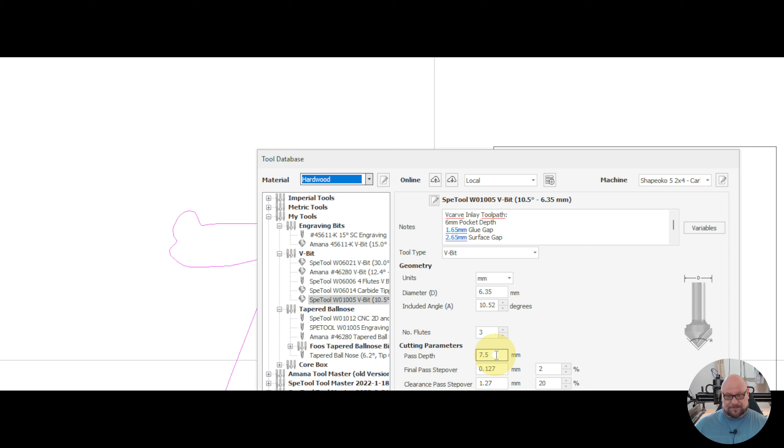And we are going to do a Vcarve engraving toolpath. That's going to be a start depth of 0, a flat depth of 6 millimeters. And for our tool, we are selecting the SpeTool W01005 V-bit, which is a 5.26 degree tapered ballnose bit. We will configure it as a tool type of V-bit. And we will go a full depth of pass that will exceed what our pocket or our plug depth will be. Spindle speed, feed rate, and plunge rate will be dependent on your CNC.

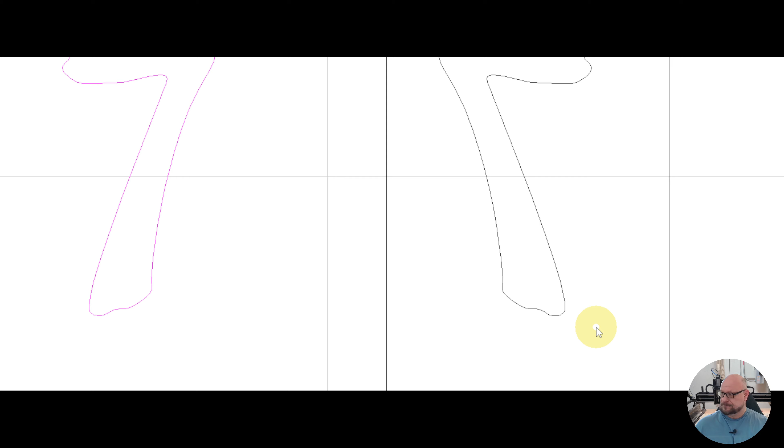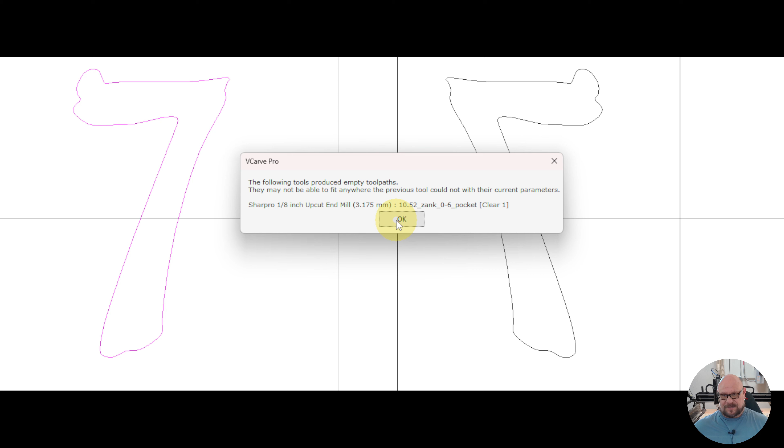All right, so now let's go ahead and name our toolpath. And we will call that 10.52, which is the angle of our V-bit, and Zank, because we're using the Zank method on this, 0.6 underscore pocket, because this will be our pocket toolpath. And we can go ahead and calculate that out. And as we see, we get an error that says that our 1/8 inch upcut end mill is not going to fit for our pocket. We can say OK on that, and that's fine.

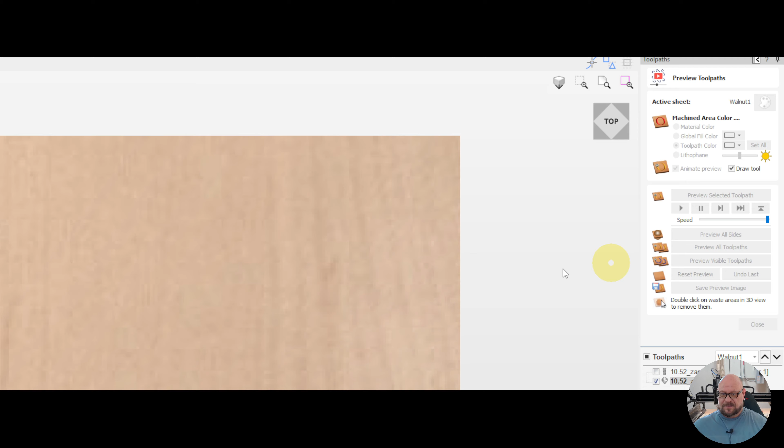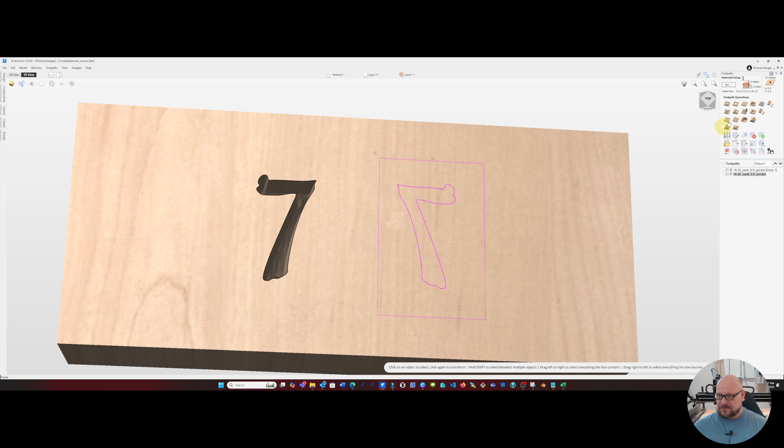So now that the toolpath is drawn, we can go ahead and preview the visible toolpaths. And what we see is that we get our pocket. Now that we've done our pocket, we can go ahead and highlight our second set of vectors, which we can do right here on the 3D toolpath. We'll highlight those.

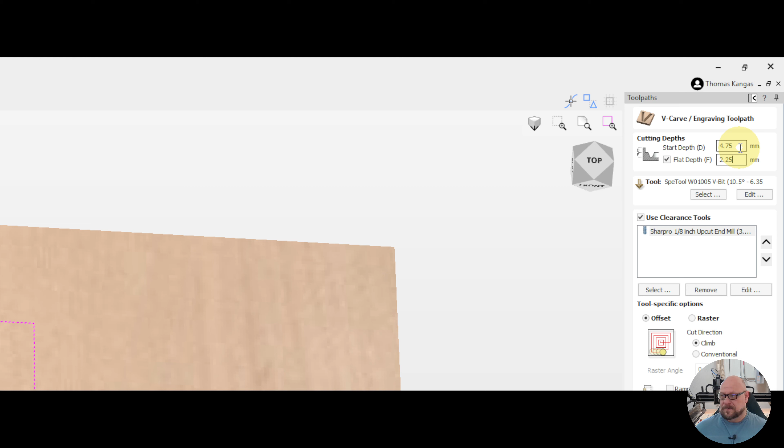We will create another Vcarve engraving toolpath, and this time we're going to go with a start depth of 4.75 millimeters and a flat depth of 2.25. And I derived those numbers from using the formula again of start depth plus flat depth will equal pocket depth plus 1.0 millimeters. We'll use the same SpeTool W01005 V-bit and the Sharpro 1/8 inch upcut end mill.

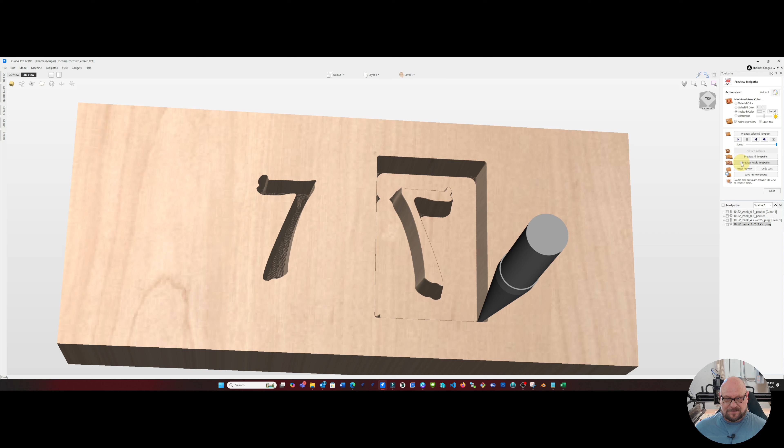We'll go down here and we'll name this toolpath 10.52 underscore Zank underscore 4.75-2.25 underscore plug. And we can calculate that out. And now if we zoom out and we preview our visible toolpaths, you'll see that we get our plug side. The only thing left to do now is to export those out and run them on the CNC.

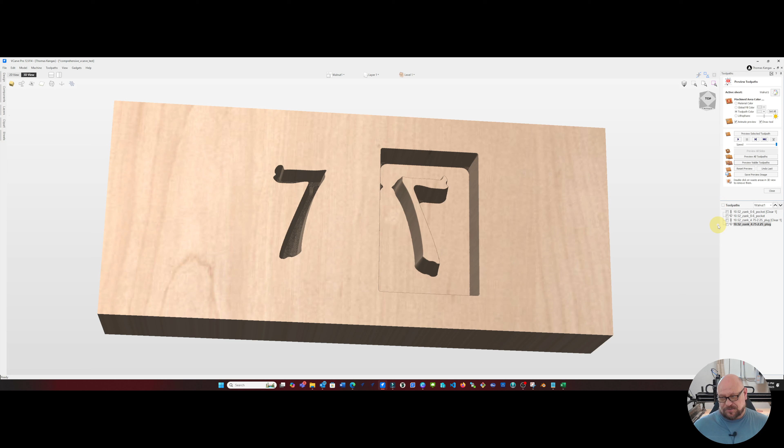So let's go ahead and go back to our Vcarve software and adjust those toolpaths. Okay, so back in Vcarve, since we already have our pocket cut, we're going to just duplicate our toolpath for our plug. So we'll right click on that and select duplicate. And then we will adjust that toolpath. In this case, I'm going to set this to 3.5 and 3.5. And again, everything else will remain the same.

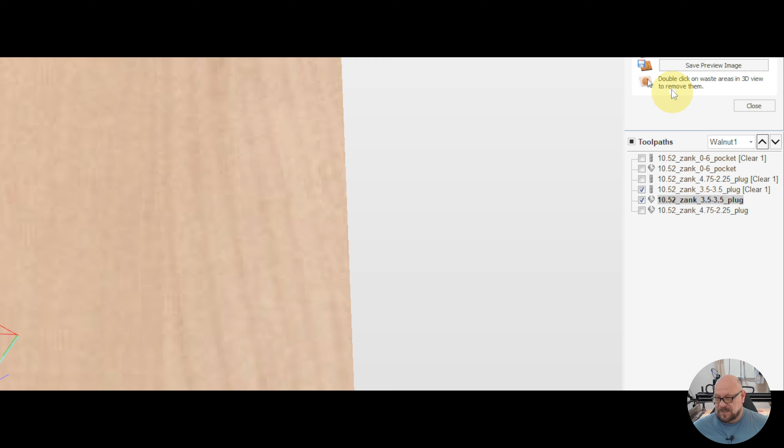And we're going to call this 10.52 Zank 3.5 and 3.5 and plug. We'll calculate that out. We will reset our preview. And what we'll do here is we will adjust these up so that we are cutting first our 1/8 inch end mill and then our 10.52 degree V-bit. We can go ahead and preview the visible toolpaths.

And what we'll see is that goes ahead and creates a new pocket for us. Now we can go ahead and export those out to the CNC, and we'll be right back to see what kind of a fit we have. Okay, so in the interest of saving time, we're not going to show footage of actually carving on the CNC for the additional toolpaths because they pretty much look the same all the way through.

But what I will show you is that I have a plug and the pocket for our Zank toolpath. This is the 3.5 millimeter start depth and flat depth. And what we'll see with this one when we insert it is that it fits in nice and tight. There's no movement whatsoever, and it's very, very difficult to pull back out. So this should be a good depth and should leave us without any kind of glue gaps around the surface when we carve it.

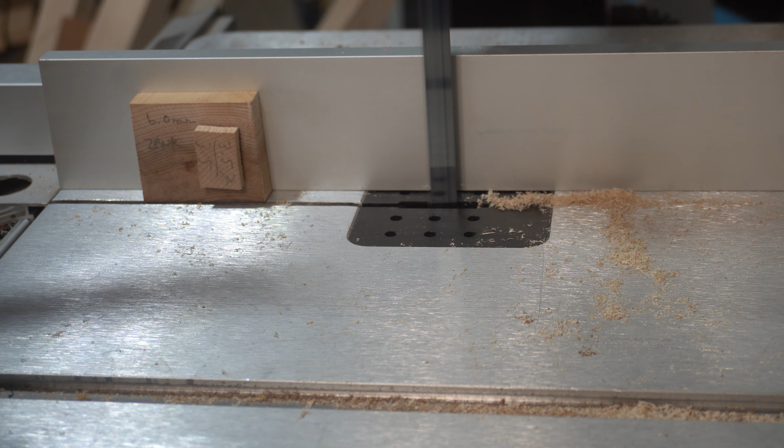Okay, so now without gluing, we're going to go ahead and take this to the bandsaw and remove the top layer of this inlay so I can show you that it's tight, and be very careful not to get yourself caught up in the blade. These are small pieces and I normally would just cut them off with the CNC. Alright, so if you look real close, you'll see all around our inlay there are no gaps whatsoever. So it's very tight. When it gets glued up, that will be a perfect inlay.

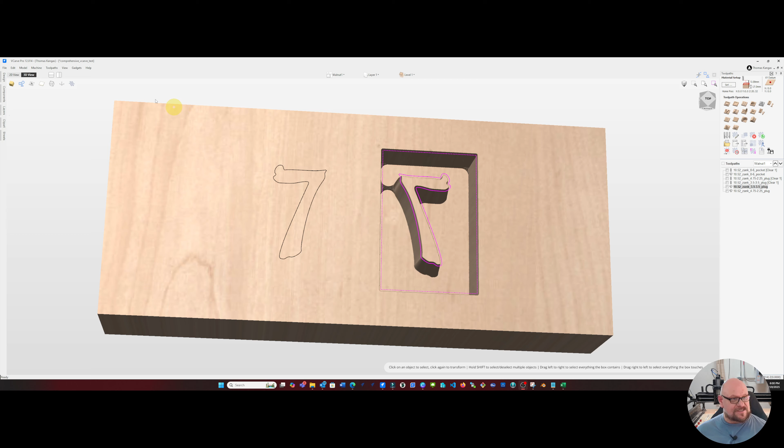Okay, now that we've gotten good parameters for our Zank Vcarve Inlay, I'm going to give you a quick tip here on how to make sure you always remember these settings. What you can do is you can go under Toolpaths and your tool database, and once that opens up, you can select your tool, and in this case it's my V-bit, my W01005. And in the notes section you can put in your parameters.

See, I've done this in the past for the Vcarve Inlay Toolpath, so we'll go ahead and do one for our current. Wait for the computer to catch up with me there. Okay. So we're going to, on this one, say Zank Inlay Vcarve Inlay Toolpath. And we'll say pocket

6.0 millimeters. Plug start depth is 3.5 millimeters. Flat depth 3.5 millimeters. And then we can apply that and say OK. And now our settings are saved.

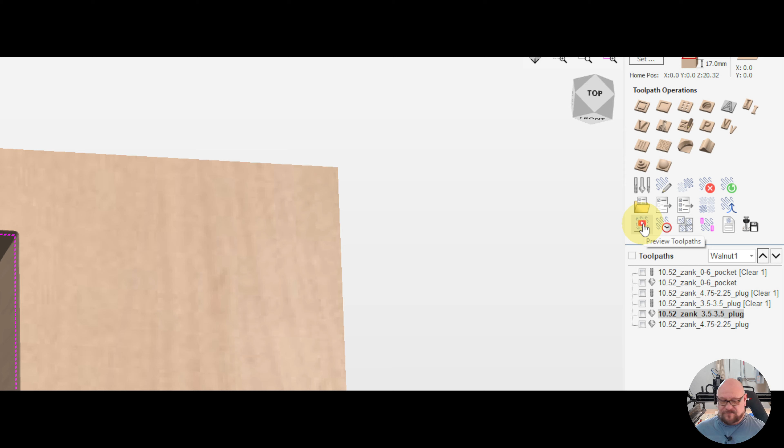Okay, so now let's go ahead and jump into the Vcarve Inlay Toolpath. Very first thing I'll do is I will reset our preview so that we get rid of the old stuff. And then we're going to do Vcarve Inlay Toolpath. So our pocket depth is going to be 6. For our glue gap, we'll set our glue gap at 1.5 and our surface gap at 2.5.

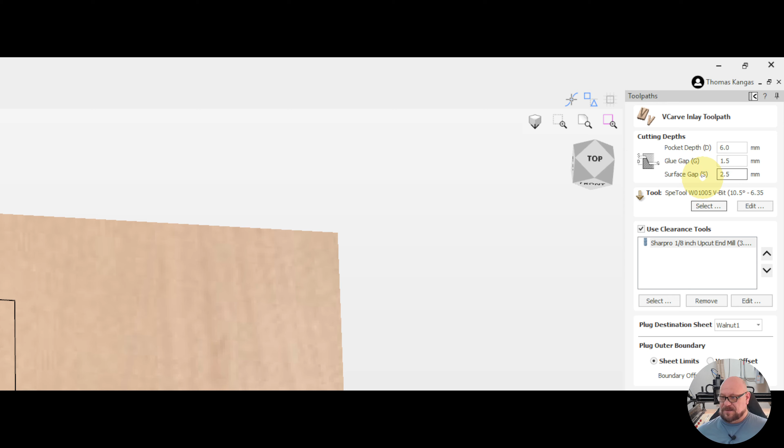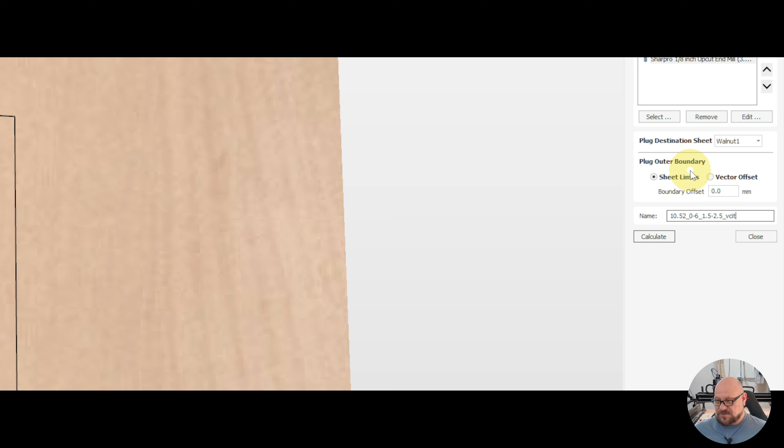And we will call that 10.52 underscore 0-6 underscore 1.5-2.5 for the plug side. And we'll call it VCIT for Vcarve Inlay Toolpath. We are going to do a vector offset. We'll set that to about 5 millimeters, but that's not important. We're going to wind up deleting that vector because, as you'll see, the toolpath will calculate and create the mirrored image with its offset. So we'll go ahead and calculate that.

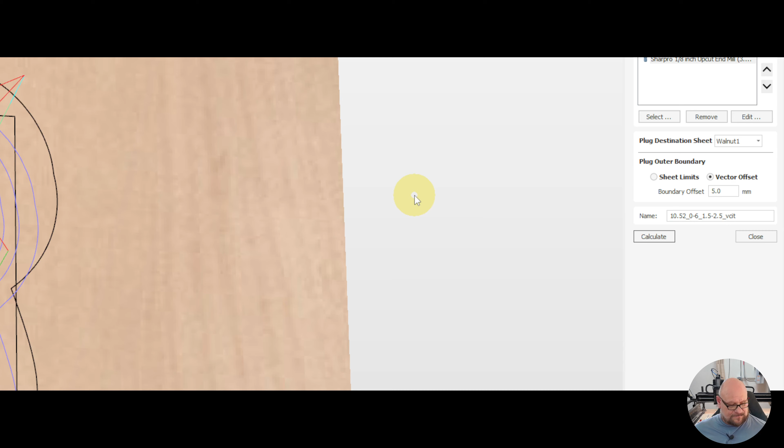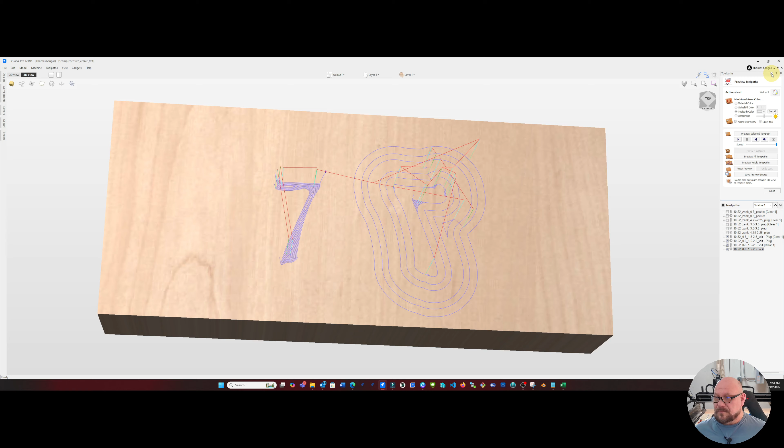And again, we have our error saying that our toolpath is not going to be wide enough to allow for our 1/8 inch end mill. Go ahead and say OK. Now we need to switch back over to our 2D view. And what I'm going to do is delete that 5 millimeter offset. And what we'll do instead is we will redo this toolpath.

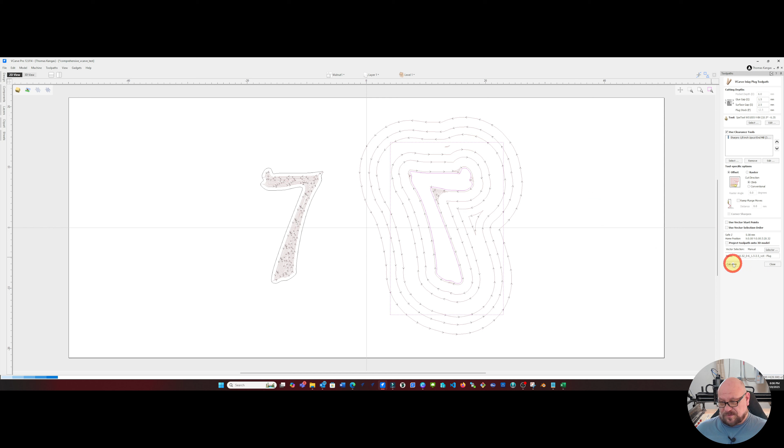Sorry, let's make sure I got the right toolpath. See, that's the clearance on the plug. So yeah, that's the right toolpath. We're going to select our inverse or our mirrored 7, and we're going to take that square toolpath around, and we're going to recalculate that. So now we have our square toolpath. It's just easier. It saves a little bit of time on generating this. All right. So now what we want to do is we want to start with our plug side.

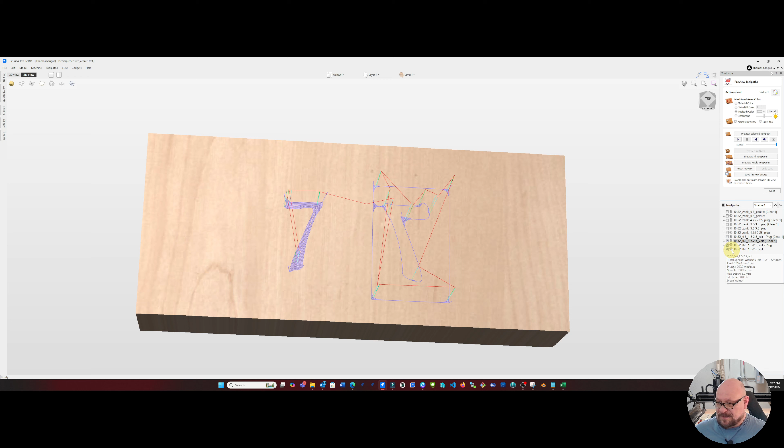But we want to get our toolpaths lined up so that we're using our 1/8 inch bit first, then our V-bit for the plug, and then V-bit for the pocket. And if we preview those visible toolpaths, you'll see that it is going to go ahead and create our pocket. And what we'll see is that we've got a plug and a pocket path. Now we can go down to the CNC and cut those, and I will show you what the result of that cut was.

Okay, so after the CNC, we've got our 1.5 and 2.5 plug, and you'll notice that it slides in and it's very, very loose. So because this is loose, we're going to have to adjust the parameters on this.

And for this, we're going to keep our pocket depth and increase our glue gap and increase our surface gap. And that will again equal our pocket depth plus 1 millimeter. So we'll go ahead and do that and adjust and go back to the software to do so.

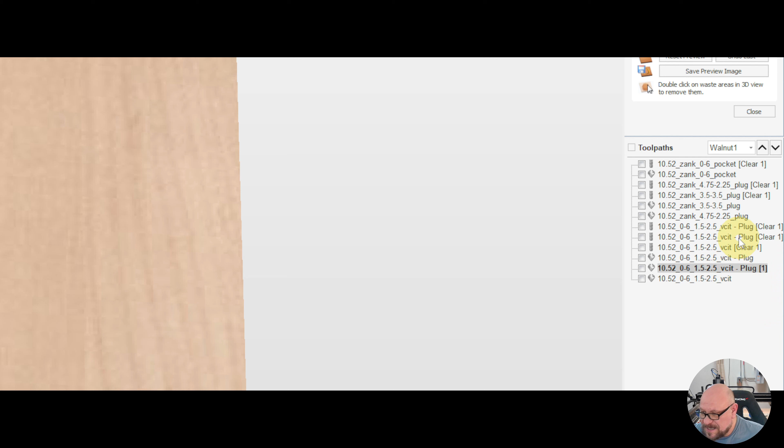Okay, so back in the software, we're going to go down and find our clearance plug, and we're going to duplicate that toolpath, and that is actually going to create two more toolpaths for us. And we're going to open up that duplicated toolpath. And this time we're going to change our parameters.

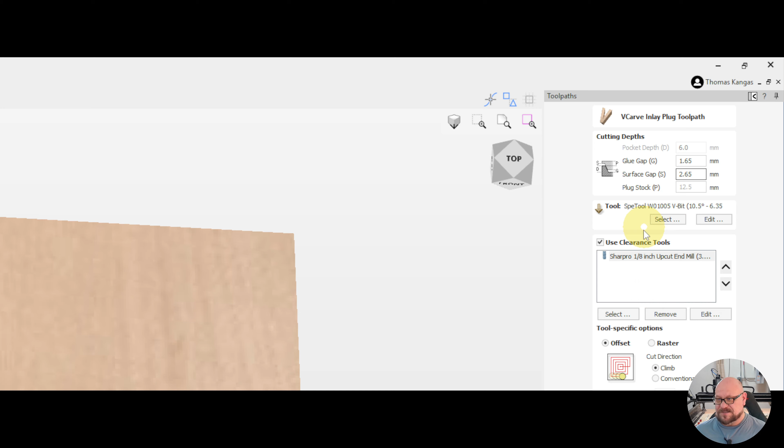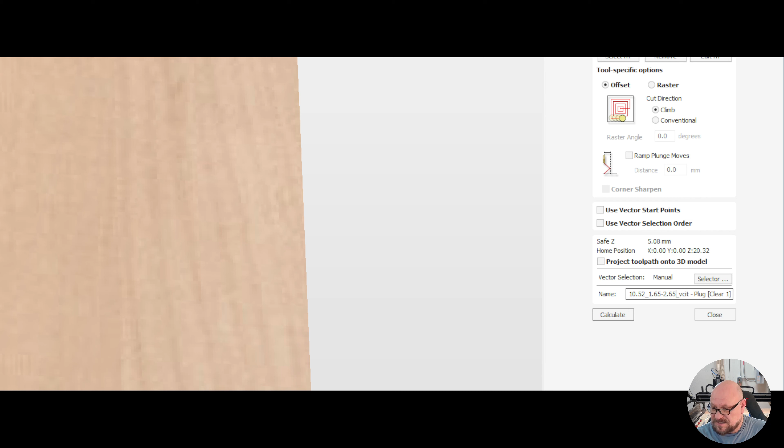And this time we're going to use 1.65 for the glue gap and 2.65 for the surface gap. So we've increased both of those to try to make this a bit tighter. And we will change the name of that to 10.52_1.65-2.65_vcit plug. Get rid of that clear. We'll calculate that out.

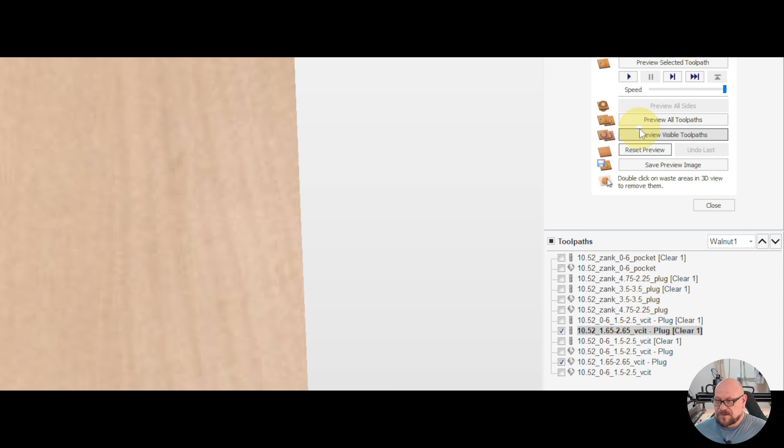Reset our preview. And we want to preview our visible toolpaths. And that'll give us a new plug that we can cut out, and we'll go ahead and get to the CNC and cut that out now.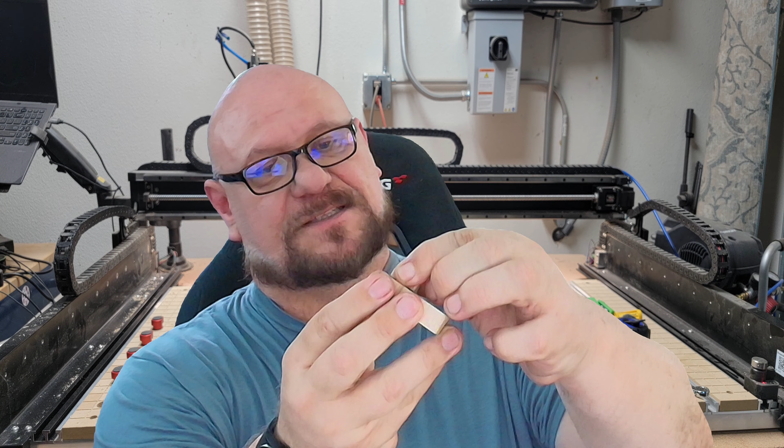Okay, so we've got our 1.65 glue gap and 2.65 surface gap cut, and when we try to fit them, we give it a little squeeze, we have a tight fit, very, very difficult to pull out. So this should be sufficient for our inlay. We'll go cut the top off of this and show you how it looks.

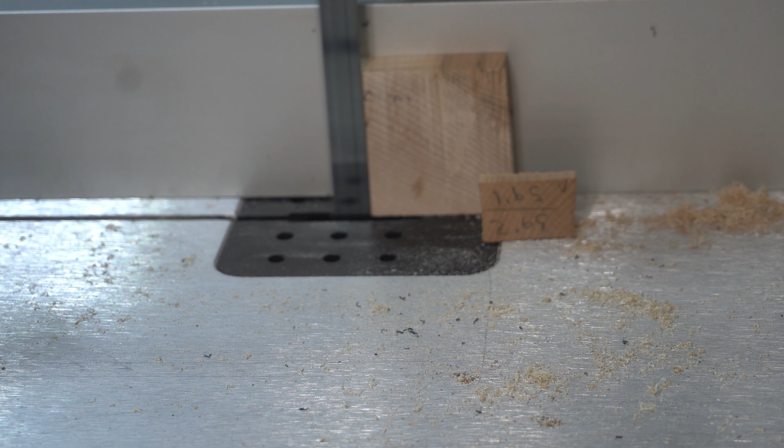Okay, so after we've cut off the top, we see once again we have an inlay with no gaps whatsoever. So when we get that glued up, this would again be a perfect inlay. So now that I've shown you how to determine good parameters for end grain inlays using the Zank method and the VCarve Inlay Toolpath method, let's take a look at the special considerations for face grain inlays, which are less common but can still be tricky to get right.

Let's take a look. Okay, starting with the Zank method, we're going to make some adjustments to our toolpaths, and we're going to start by duplicating the pocket toolpath, and then we will also duplicate our 3.5 toolpath.

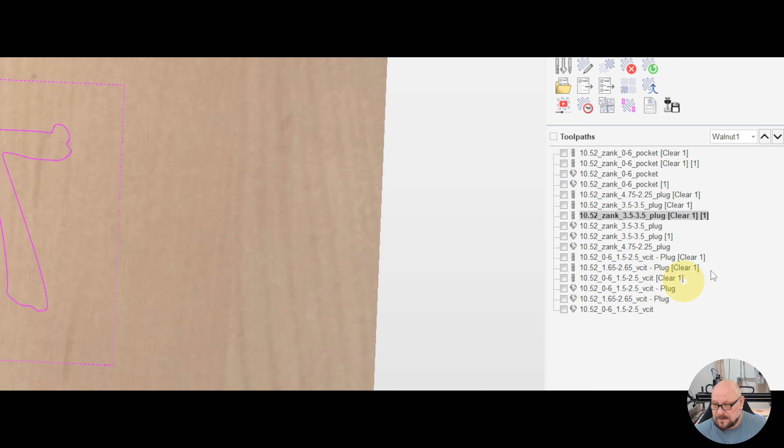All right, so going back to our pocket, we're going to open that up, and the very first thing that we're going to do is on the tool itself, we're going to edit that, and we're going to change the pass depth to 1.0 millimeters.

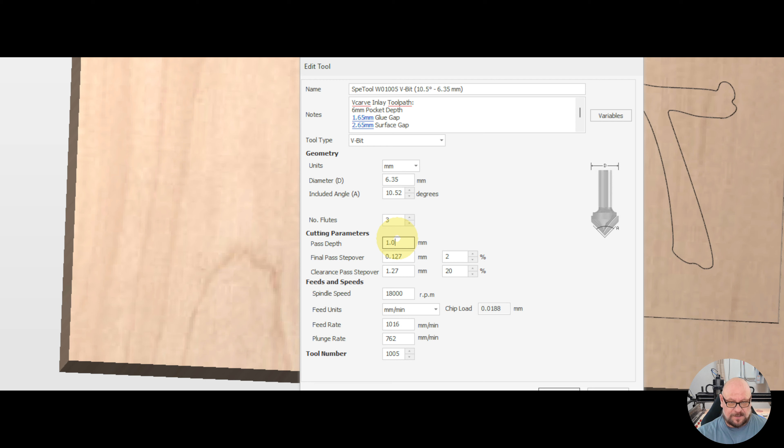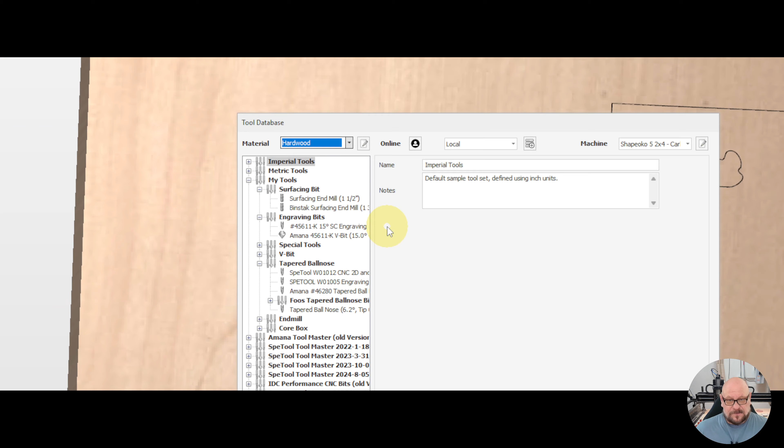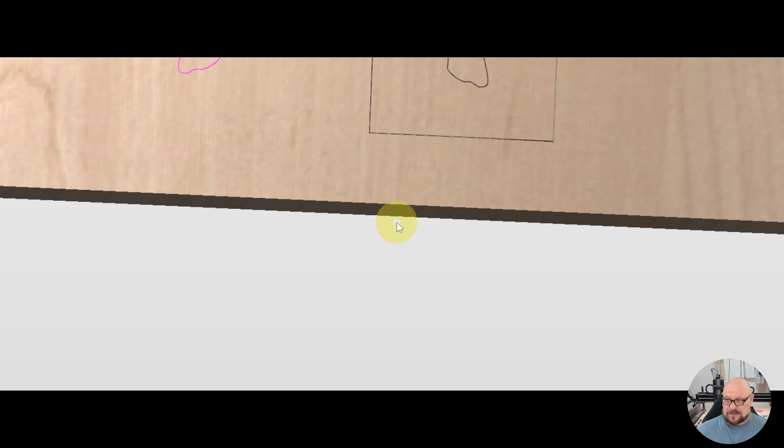Then we can remove the 1/8 inch end mill there, and we're going to use our same V-bit, our SpeTool W01005, and this time we're going to go our full pass depth of 6 millimeters. So we'll go ahead and select that as our clearance tool for the pocket side. And we will keep the naming pretty much the same, except we will add face grain to the end so that we know we have our correct toolpath.

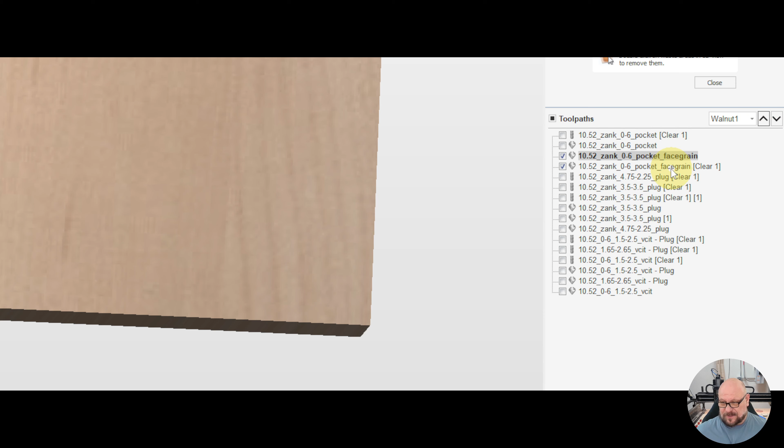So what you see here is you have two face grain toolpaths that have been made here. We want to make sure in order that they go with the V-bit going at a 1mm depth first, and then the clearance tool. So if we do these in order, zoom out here, we'll start with our pocket V-bit.

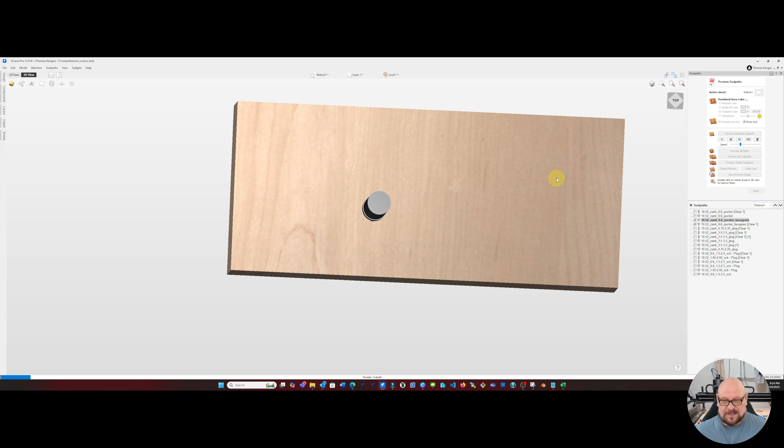Slow the speed down so we can see it. And what you'll see is that it goes around the contours of the pocket. It doesn't just dive all the way down, it goes slowly, and this is going to help us to prevent chip out on the pocket side. And this should give us a little bit of a tighter toolpath.

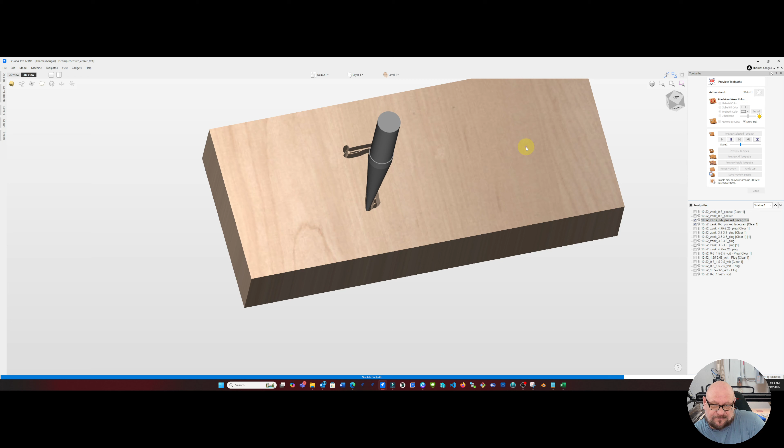Next, we do our clearance tool path, and this one is going to dive the entire depth and clear out the rest of the pocket for us. And it's not going to hit our sides directly, so it reduces the chance of chipping it out quite a bit. So we run our same 1/8 inch tool path, but this time with a full depth of 6mm, and it'll clear out all of the excess material in the pocket.

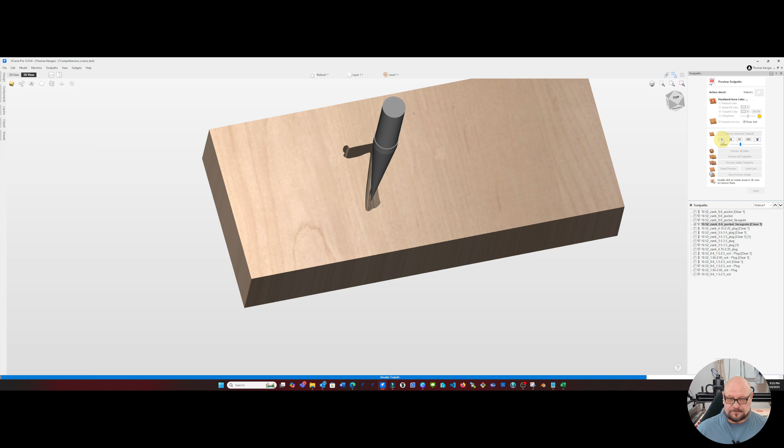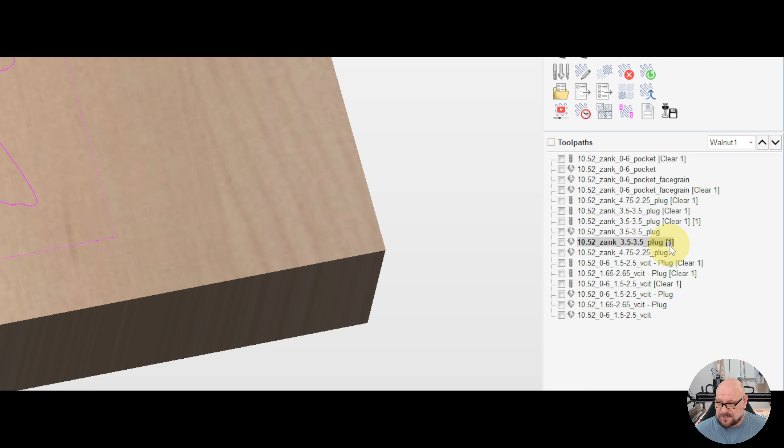Okay, so now moving on to our plug tool path. The plugs indicated with 1 and square brackets behind it are the duplicate paths that were made. So we're going to open that up, and we see we have our start depth and flat depth. And in this case, again, we're going to edit our tool, and we're going to change our pass depth to 1.0mm.

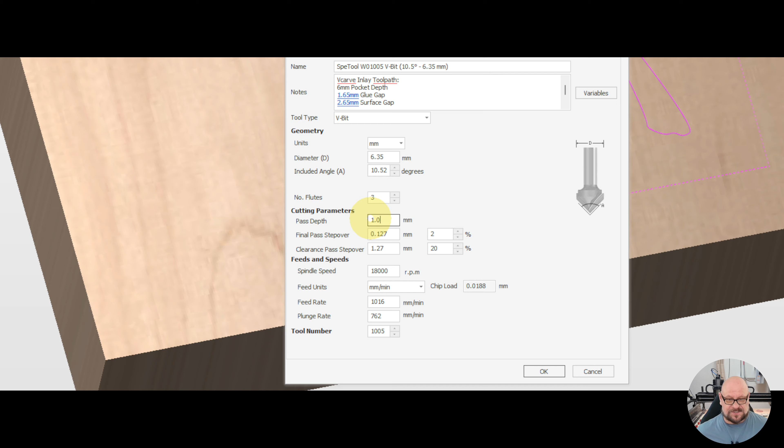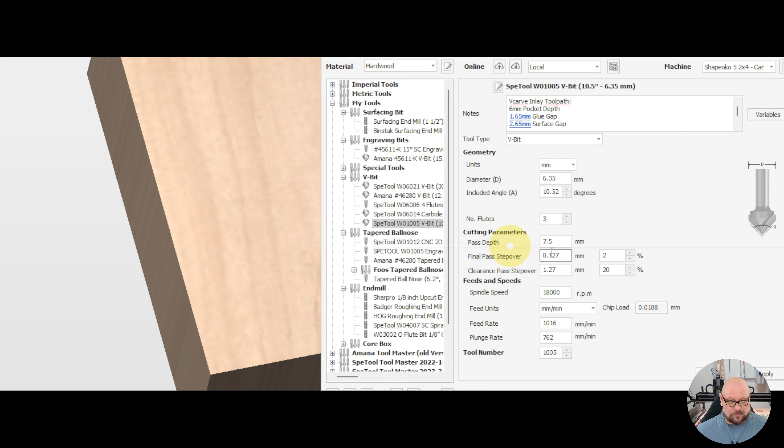For our clearance tools, we're going to select that V-bit again, and we're going to go with our full pass depth of 7.5mm. Then the next thing we need to do is to adjust that so that it cuts before the 1/8 inch bit. And then we can go ahead and calculate this, and this time we're going to give it a name of the plug with face grain.

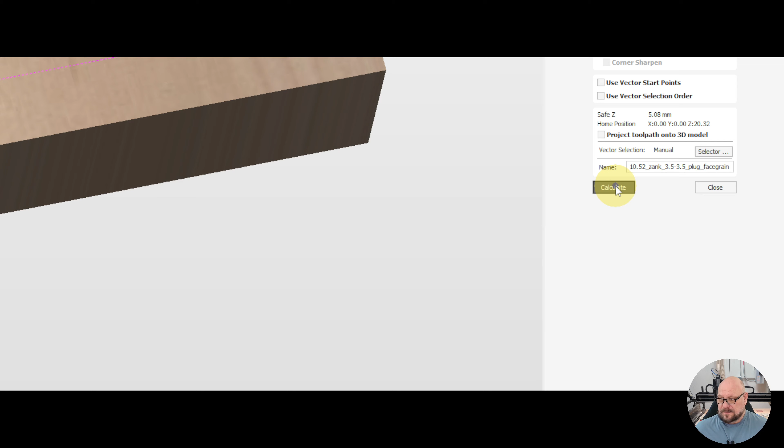And this gives us a warning telling us that our area clearance tool has a larger included angle than the carving tool. This is okay. This is not going to affect the inlay.

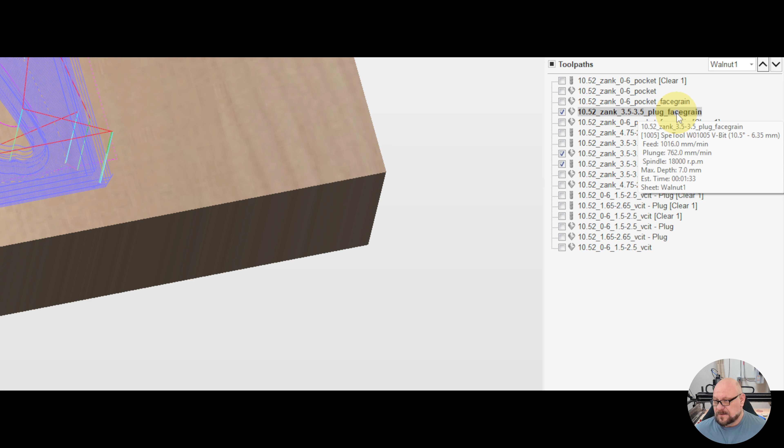All right, so now we're going to arrange the plug to also do the 1mm path first, and then we will go down for our clearance tool, and move our 1/8 inch bit to the last, so that the first paths that'll get cut when we export all of these will be the V-bit followed by the 1/8 inch bit.

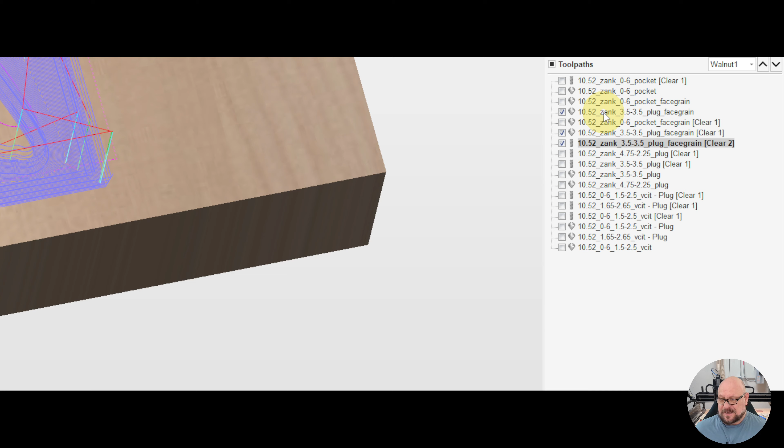All right, so let's go ahead and start looking at how this is going to cut. So starting with our plug, our first path is our V-bit, going at 1 millimeter deep. And if we execute this tool path, we'll see we go 1 millimeter depths all the way around.

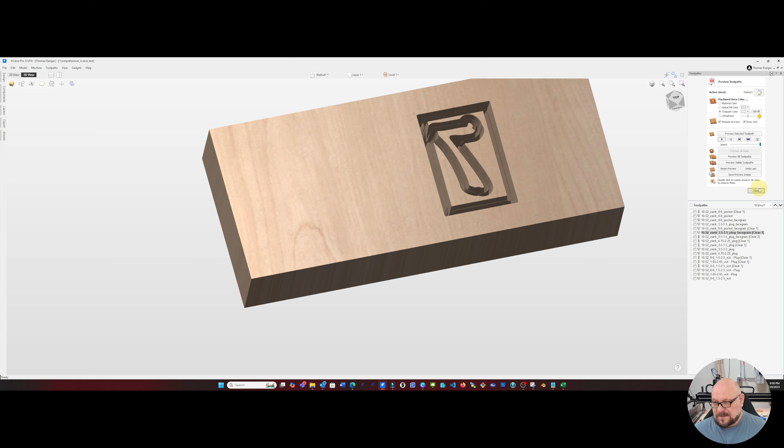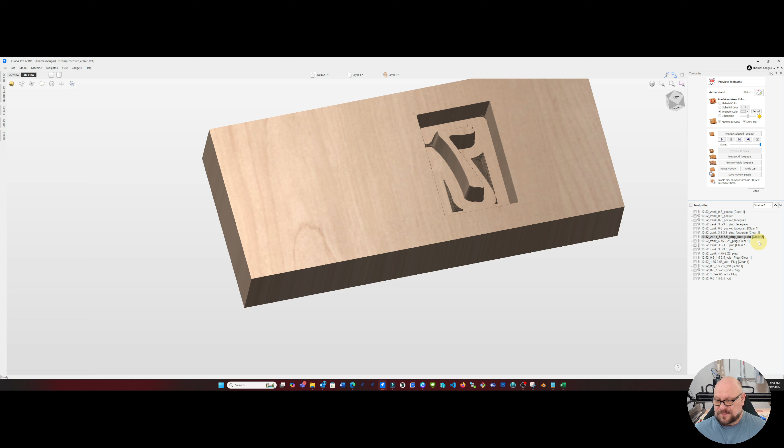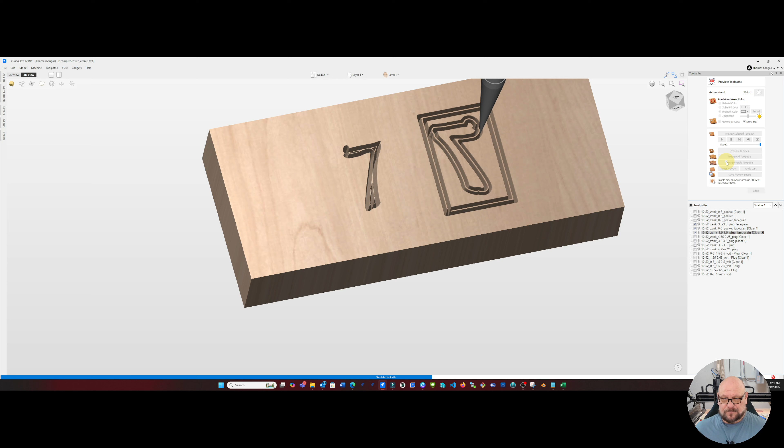And then we will clear our tool out. We actually won't need that. We'll be able to delete that and use just the clearance number 2, which would be our 1/8 inch bit. So we will go ahead and delete that, and we will do all of our face grain toolpaths in a row. So in total there will be 4 toolpaths, and we will preview the visible toolpaths. And you see that it's going to do the contours of the pocket and the plug.

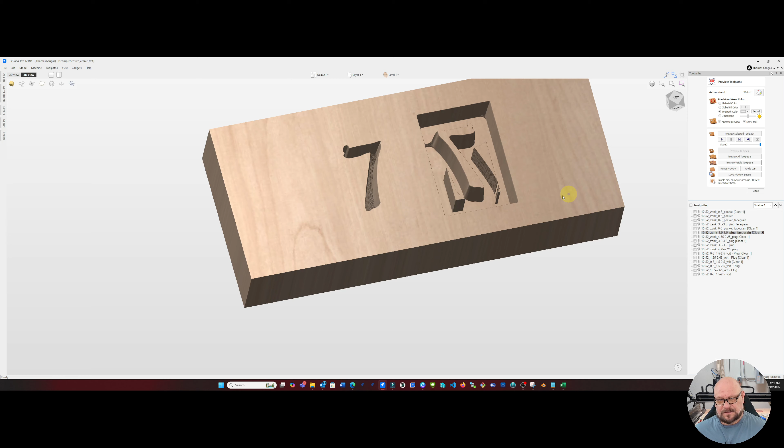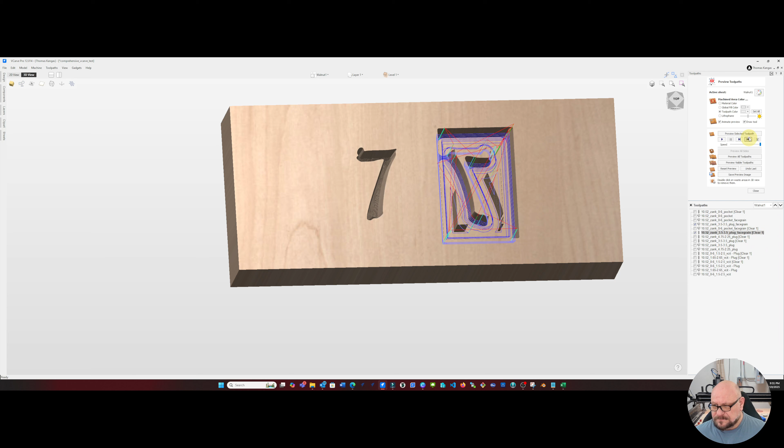And then the toolpath. And I think I've got something wrong with that toolpath, so we're going to edit that. Clearance number 2. Let's calculate that. Yep, I needed to recalculate the toolpath after deleting the bit, so we should be good to go there.

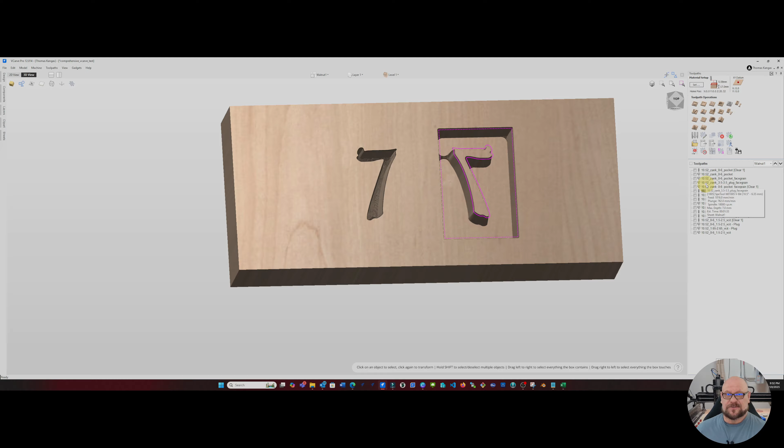So the first tool paths that we see are going to be the contours around the pocket and then the contours around the plug side. And then we'll go back with our clearance tool paths and clear those out.

And fresh off the CNC, we'll see that there's no chip out on either the pocket side or the plug side. Now we'll trim all the excess material off the plug and the pocket, and we'll be ready to fit it.

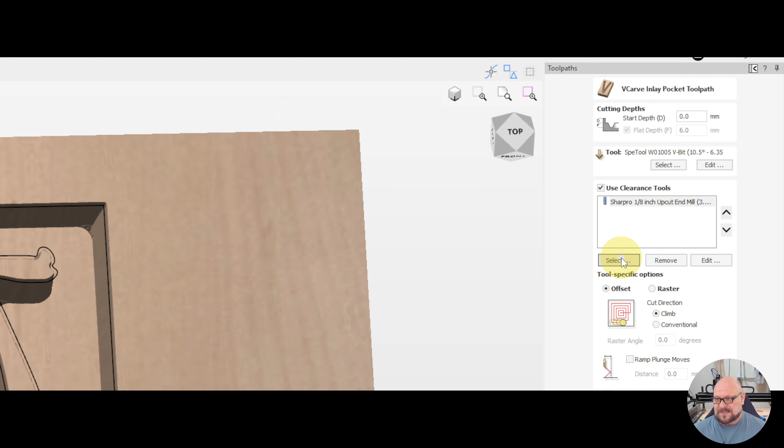All right, so we will start with our 1.5, 2.5 VCarve and edit that toolpath. And this is going to be just like the last one that we did with a traditional or Zank inlay. We're going to edit our tool, and we're going to set the pass depth at 1.0 millimeters. And we will apply that. And then we will also set the clearance tool as our V-bit. But this time, again, we will go the full 7.5 millimeter cutting depth. So we can select that and make sure that that's above the 1/8 inch, which we can actually remove because that toolpath won't use it anyway.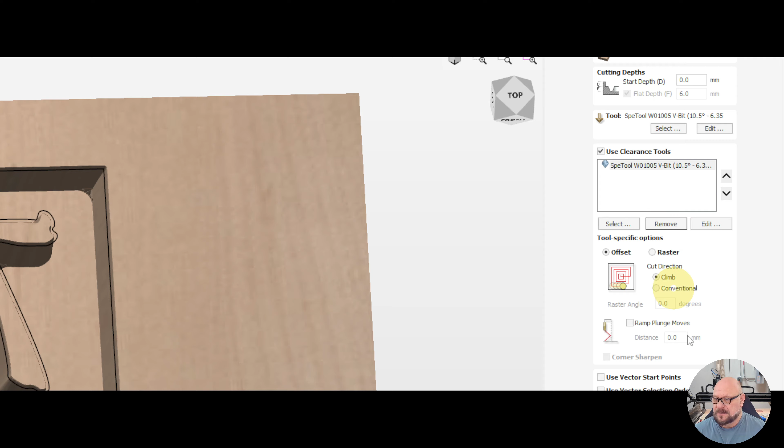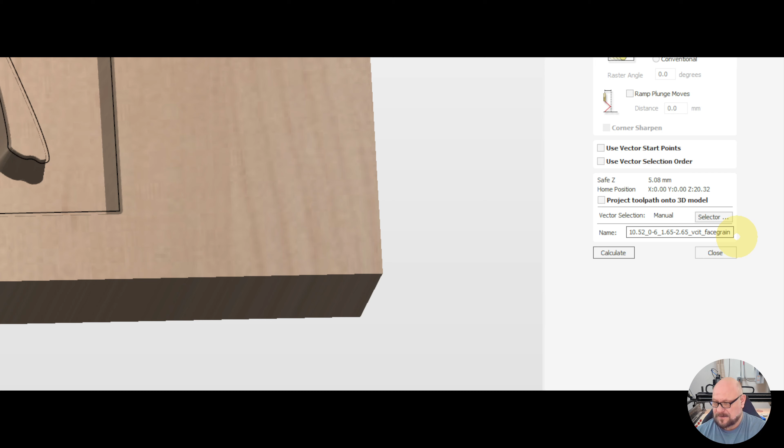And for our path, we'll call it 0, 6, and 1.65, 2.65, VCarve, and underscore face grain. And we'll calculate that out. Reset our preview.

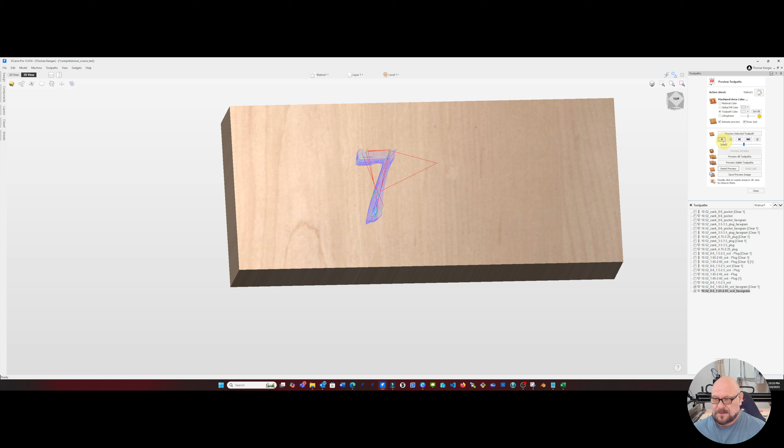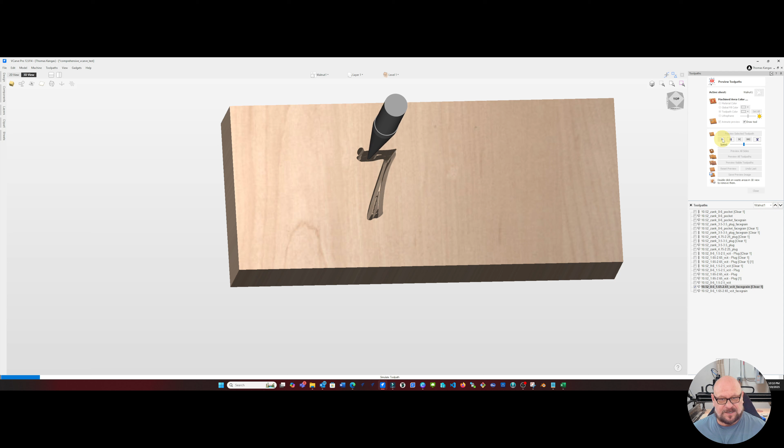And now if we run the V-bit toolpath first, you'll see that it once again will create the toolpath that is only the contour of the pocket, and then we'll go and run the clearance toolpath, and we'll see that that same bit will clear out the remainder of the pocket. So we'll arrange those to where our first V-bit runs, and then we'll have the clearance tool run afterwards.

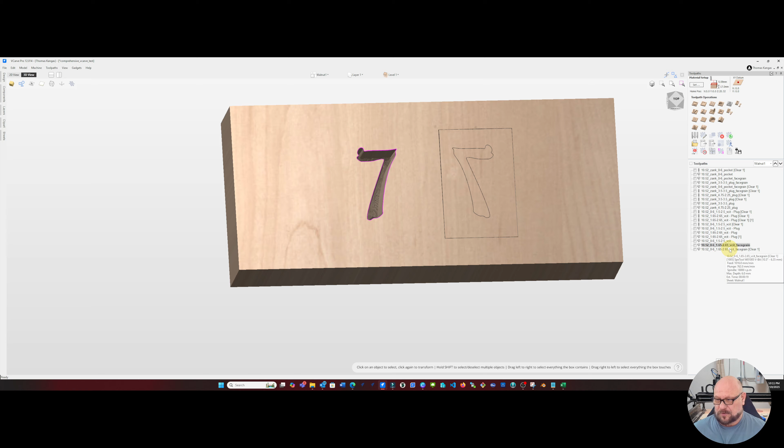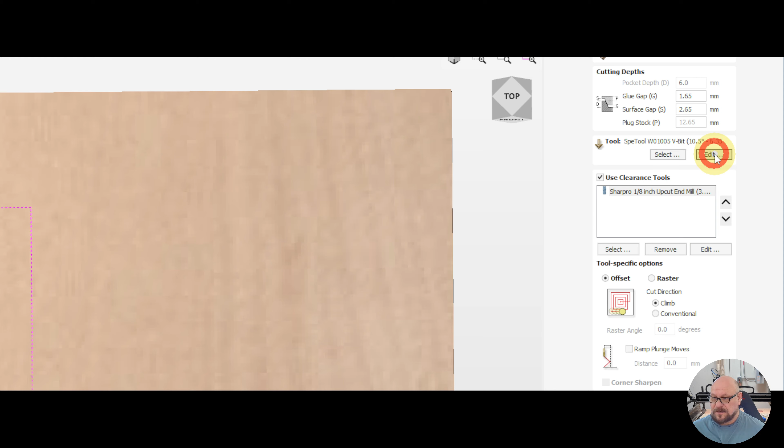Okay, moving on to the plug side of things, we will now take our plug and we will go in and edit that. And we are going to, again, change our pass depth on our V-bit to 1 millimeter. And then for our clearance tools, we're going to keep that 1/8 inch upcut end mill, but we're also going to add our V-bit again. So we'll add our SpeTool W01005. This time we will go a full cut depth of 7.5 millimeters. And now the important thing here is go ahead and leave that SpeTool bit as the second clearance tool, and we're going to make some adjustments to that once we generate the carve.

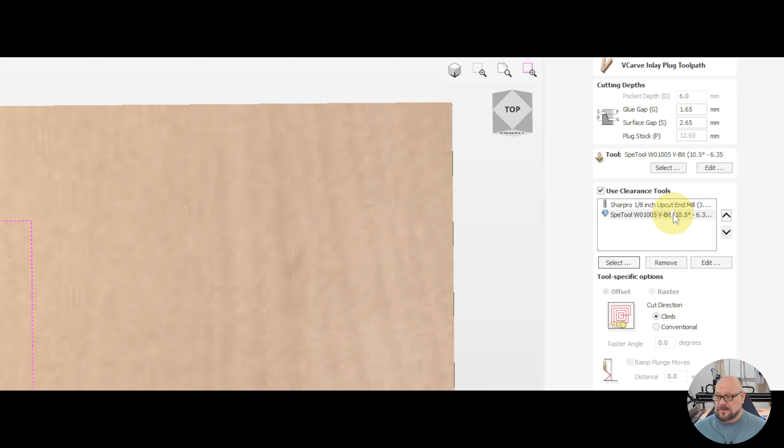So we're going to name that as our plug, and we're going to say underscore face grain. What this will do is calculate out 3 paths, as we see here. We've got our plug face grain, clear 1, and clear 2. Now the way we want to arrange these is that our V-bit 1 millimeter path is first, and then our full depth clearance with the V-bit, and then our 1/8 inch end mill. So we're out of order right now, so we're going to take that clear 2 and move that up to be our second carve in the path.

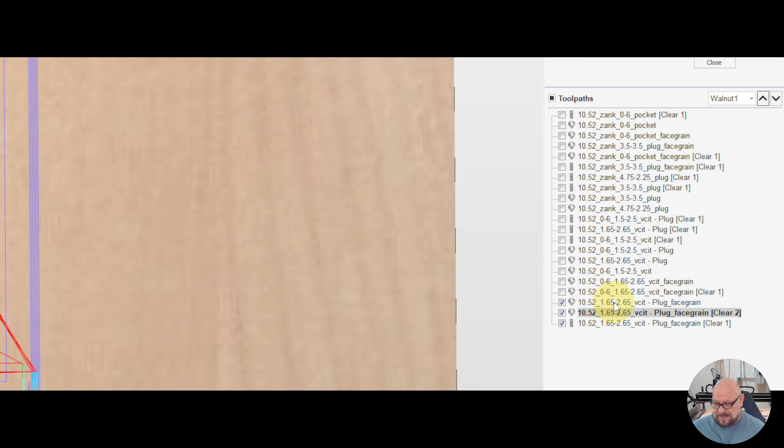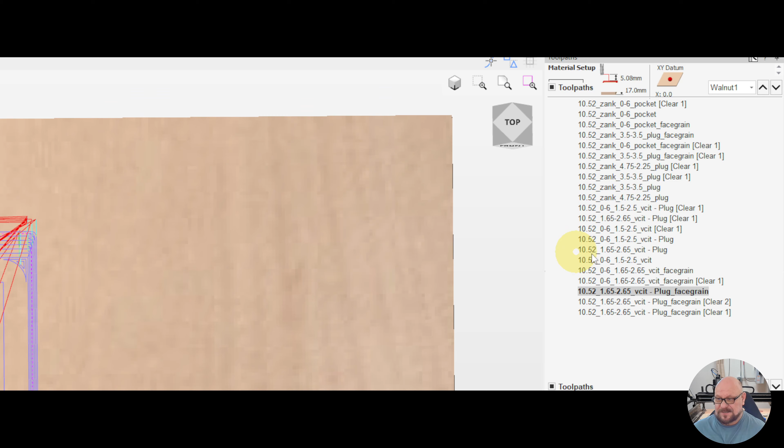And now we can export out all 3 of our tool paths. Actually, let's run these so you can see what's going to happen with the plug side. So starting with our 1 millimeter depth, when we run that, it's going to go along the contours of the plug till it goes all the way down. It'll make 7 passes to go down.

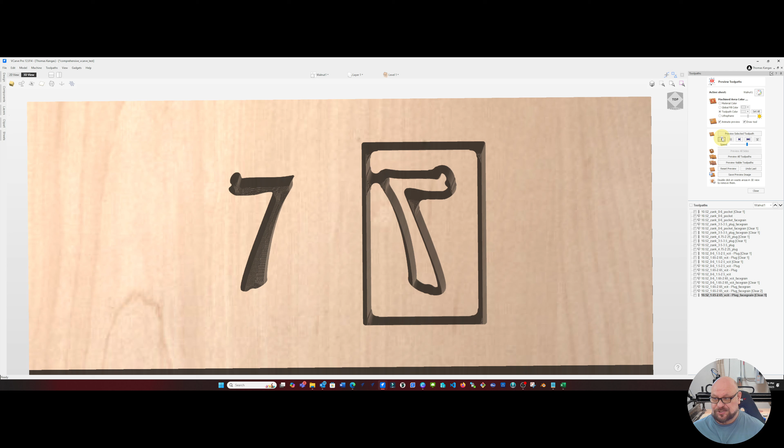Our next path is our clearance path, and it's going to go the full depth of the 7 in one shot. And you'll see it only hits a couple of areas to clear in order to give clearance to the final tool path, which is our 1/8 inch end mill. So once our tool paths are ready to go, we can export those out to the CNC, and we'll come back and take a look at the end result.

In this video, I've shown you the methodology I use for determining VCarve inlay parameters for both end grain and face grain inlays using Vectric VCarve Desktop, Pro, and Aspire.